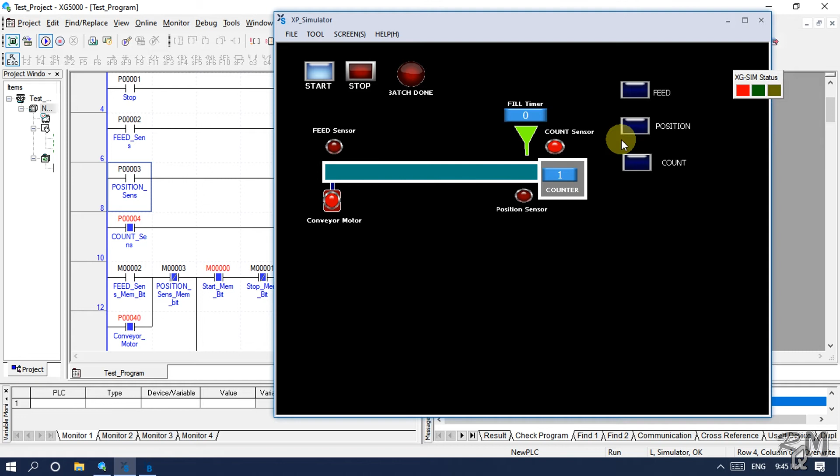This video is especially for those beginners who are curious about learning PLC, SCADA or DCS. In this video I am going to show you how you can create a PLC and HMI simulator which you can use to learn and test your logic skills. In HMI simulator you can visualize your project. Advanced users can also use this simulator during the design phase. Master KPLC and KGL-Win users can also use this simulator to test logic programs.

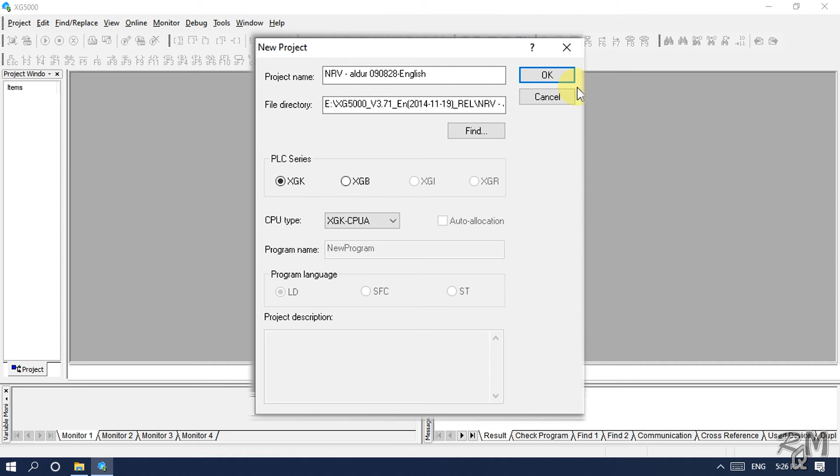If you want to test your KGL-Win logic, then click on the project menu. In the sub menu you can see two options: open KGL-Win file and open GM-Win file. Click on open KGL-Win file. When you click on KGL-Win file, it will ask you to select PLC series. In XG5000 there is no option for Master KPLC, so you can choose any compatible PLC. I am selecting XGK series and CPU type XGK-CPU-A. Click OK. Then a new program window will open.

Maximize the window. You can see your KGL-Win logic with device names. If you want to see variable addresses with device names, click on the view menu, then click on devices/variables. Now you can see device names with variable addresses.

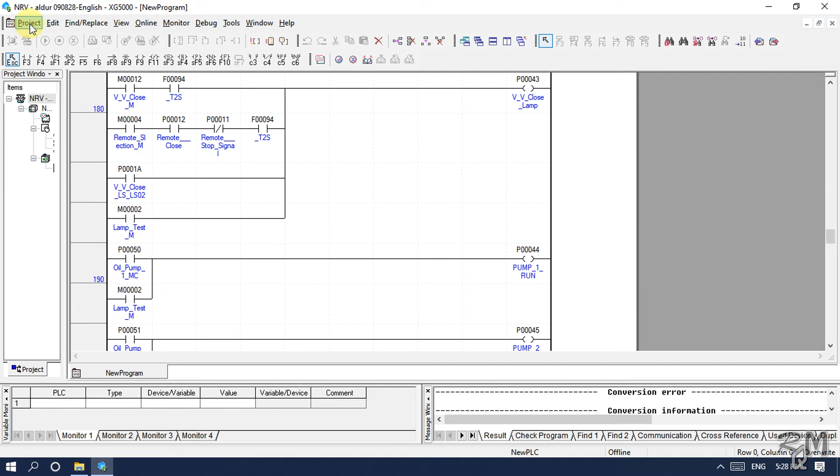Now I am closing this project without saving, and we will create a new simple project for beginners. Just for fun, we will create an automatic bottle filling project with a conveyor.

In this simple project, we have one conveyor with a motor and one feed sensor which will detect the bottle and the conveyor motor will start. The bottle will start moving and keep moving until it reaches the position sensor. When the position sensor becomes active, the motor will stop. Then bottle filling will start with a timer.

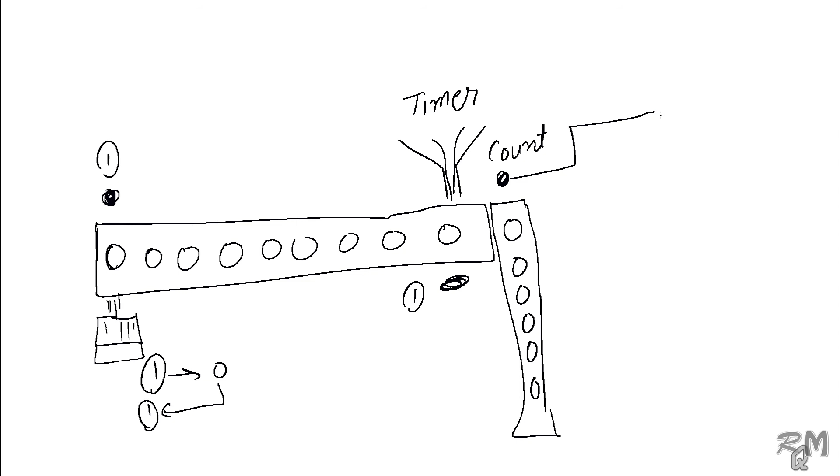When the timer finishes, the motor will start again, and there will be another sensor which will detect the filled bottles. We call this sensor the count sensor. When 6 bottles are filled, the counter will stop the conveyor. So this count sensor will give a signal to one counter.

In this project, we need 5 inputs: start switch, stop switch, feed sensor, position sensor, count sensor. Basically we need only one output to control the motor. Maybe we need more, then we will decide during logic design. We need one timer and one counter. It is a really simple project.

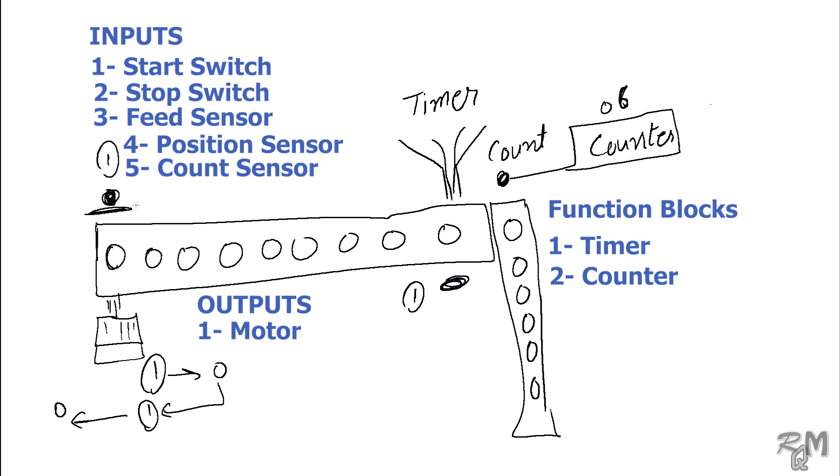Let's get started. Click on the project menu, then click on new project. A new project window will open. Type the project name, test_project. Click on find to save in the desired folder.

In PLC series, we have 4 options: XGK, XGB, XGI, XGR. Program language for XGK and XGB is ladder by default. We cannot use SFC and structured text in XGK and XGB series PLCs. In XGI and XGR we can use all 3 languages. If you don't know what SFC and structured text programming are, don't worry, you will learn in the future. For now, keep in mind that SFC is sequential function chart, like flowcharts, and statement could be any program language like C++, Fortran or COBOL programming.

For our beginner project, I will select XGK PLC and CPU type XGK-CPU-A. Program name, I will type test_program. Program language is ladder by default. Description: for practice. Then click OK. An empty test program window has opened.

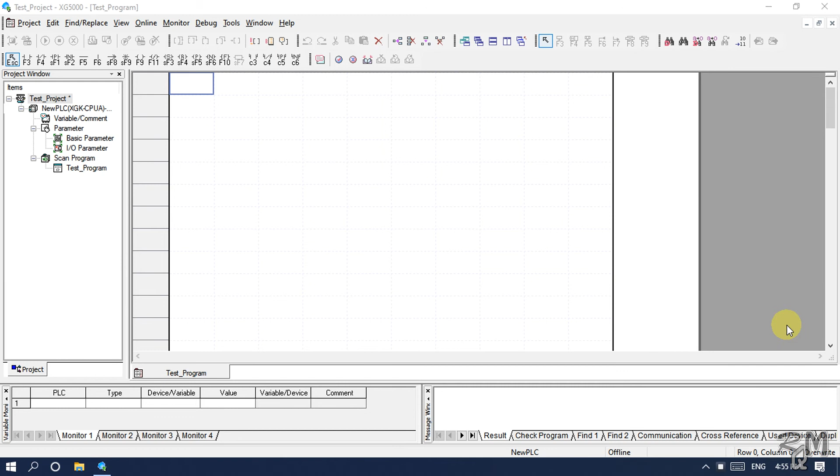Now first I will create the start and stop logic. Click on normally open contact, then click on the first step of the program window. A variables and device box will open. Here you will create a variable and device table of your inputs, outputs and other devices. Currently you cannot see any variable or devices because I didn't create any variable.

Now click on the variables/devices box and enter the address of the input of PLC, P00000. Make sure the add to symbols box is checked. Click OK.

Now enter start in variable box and in comment box also write start. Then click OK. So the first physical input is created.

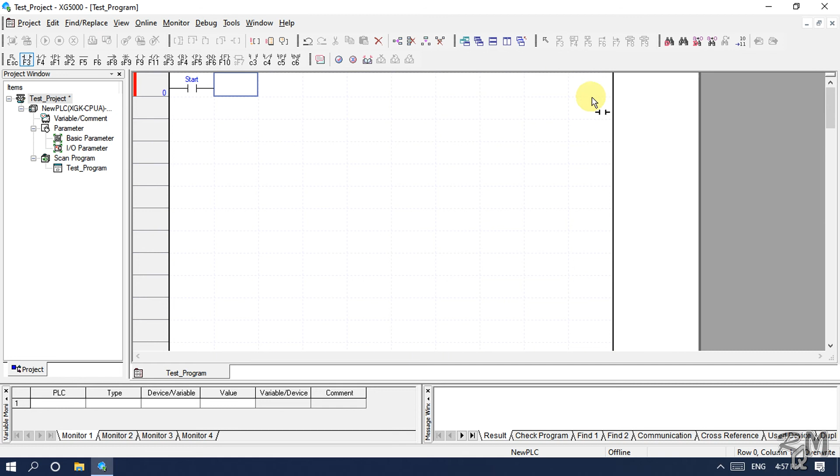Now I will operate output through this input. For output, click on coil, then click on the right side of project window in front of start input. Again the variables device box will open. It is actually your variables or symbols table. You can see the start variable which we created before.

Now we will create output variable. In PLC and DCS programming languages, you can use two types of output addresses, physical or virtual. Physical addresses relate to output cards, whereas virtual addresses are just memory bits or bytes which we use internally in logic design.

We will create start_memory_bit. Memory bit address will start with letter M, write M and 5 times zero. Now click OK. Write variable name start_mem_bit. In comment write start memory bit and click OK.

So we created the first ladder of our logic program. Same way, we will create stop logic. Click on normally open contact.

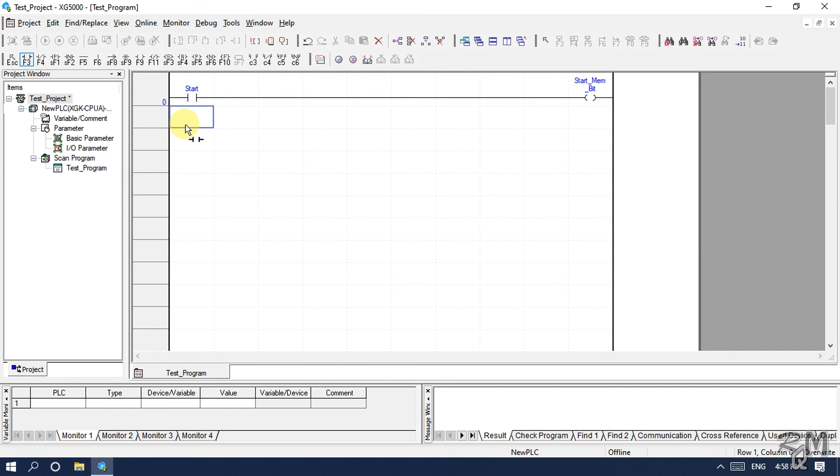Click on second line. You can also write the first variable name. Write stop. Click OK. Now you can assign address to this variable. Enter P00001. Write stop in comment.

Click OK. Select coil. Click on project window. Enter M00001. Click OK. It is stop_mem_bit, you can say stop memory bit. Click OK. Now select normally close contact and click on the line of start logic.

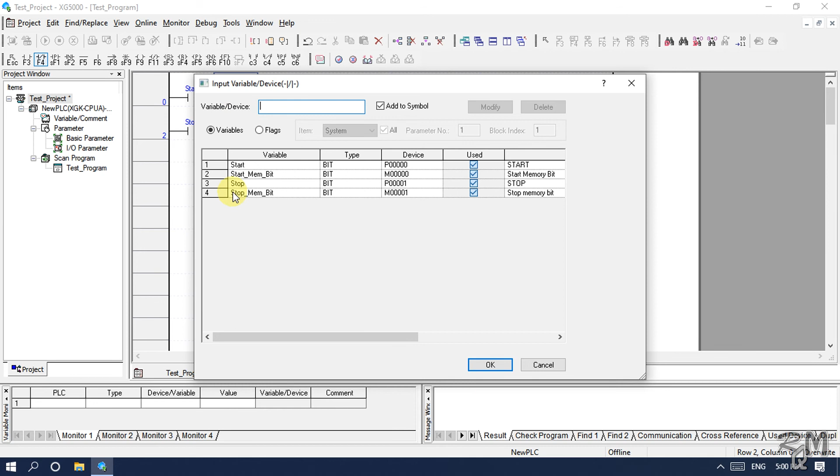Then from the variable table, double click on stop_mem_bit. Our basic start and stop logic is ready for testing.

Before testing, if you observe left side in project window, you can see a small asterisk sign or dot above the test project. It means that this project is not yet saved. So before testing, it is best practice to save your project.

For this purpose, click on project menu and then click on save project. Now you can see there is no more dot. Now we are ready to test logic.

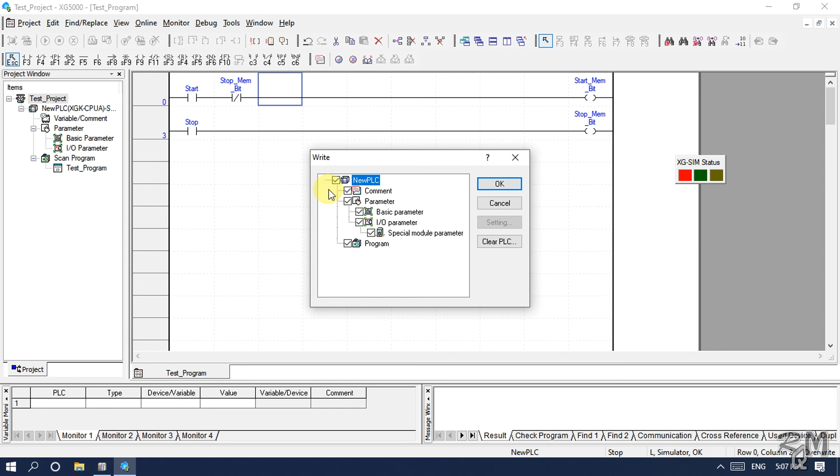For this purpose, click on tool menu and then click on start simulator. Click OK to write or download the program to XG-sim.

But it is showing error. Cannot write program to the PLC. See the check program window for details. Click OK. Writing is not completed.

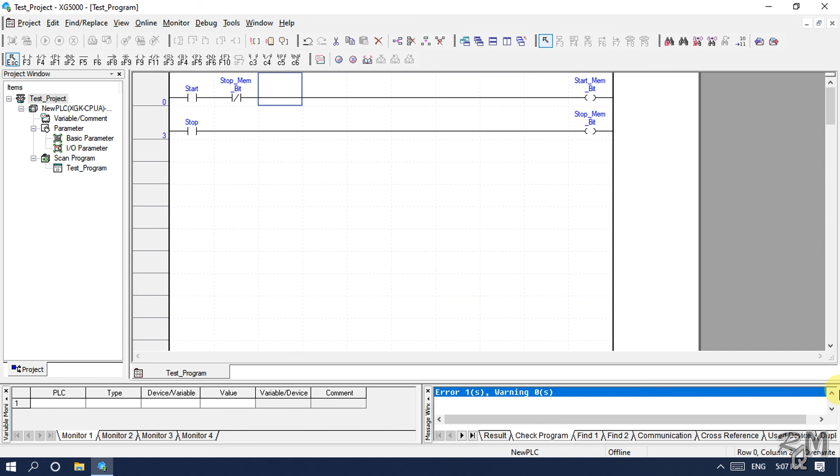Click OK. Now in the check program window at the right bottom of XG5000 screen, you can see error 1 and warning 0. If you scroll up, you can see details of the error. It is error E4000, instruction does not exist.

In most PLC logics or programs, you need to use the end statement to complete and finish the logic or program. So we will add end function block.

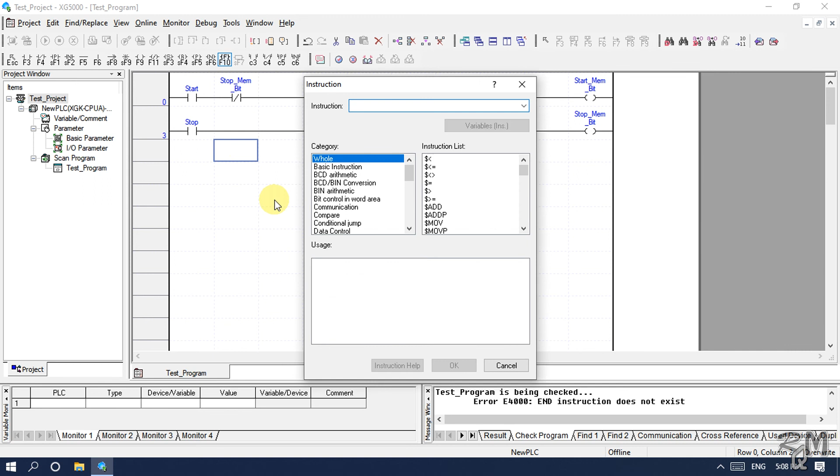Click on function F10, then click on empty line after last ladder. In instruction box search for end. Select end and then click OK. This logic is technically completed.

Now click on arrow and again start simulator. Click OK to write or download in XG-sim. Writing completed without error. Click OK.

Move simulator on right. Make sure monitor button is active and then click on run button. Now double click on start input. Select true and click OK.

Start input is forced to active state and you can see start memory bit is energized. Now to de-energize, I will force stop input to active state. Stop memory bit is energized and start memory bit is de-energized.

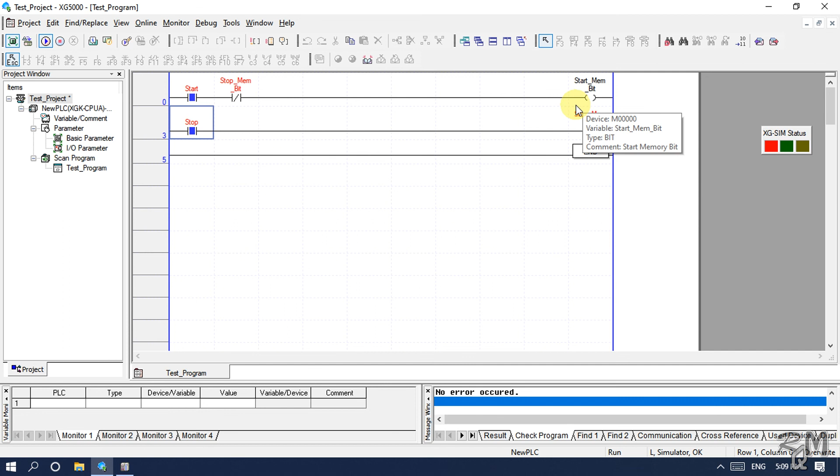Now deactivate start and stop with the same method. So it is a simple method to test logic in XG5000 by using the simulator.

Now I will create a simple HMI screen for this logic. Keep XGSim in running condition, minimize XG5000 and open XP Builder to create HMI screen. Click on Create Project button, select iXP series and model.

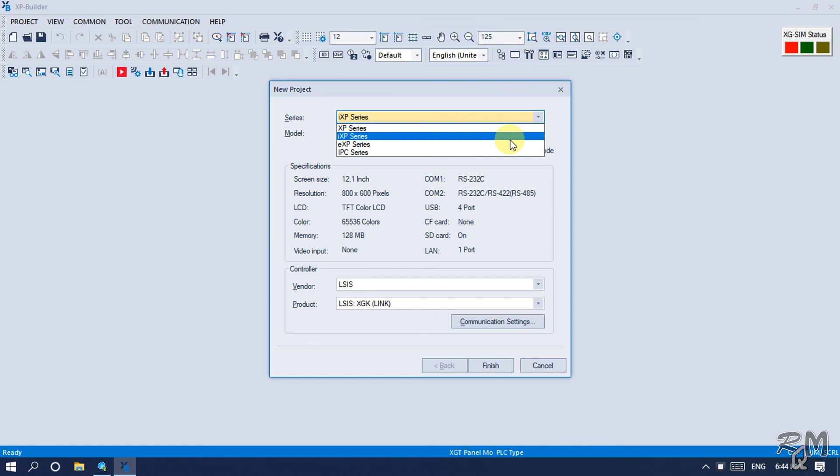iXP50-TTA. It is a small HMI. Click on Communication Settings button.

Here in Controller tab, you can change controller settings and controller properties according to your requirement. Which protocol and COM port you are using, you can set here. Currently we are using PLC simulator, so check PLC simulator box and also check program monitor box. Other options like screen settings, security settings and all downside settings we will not change.

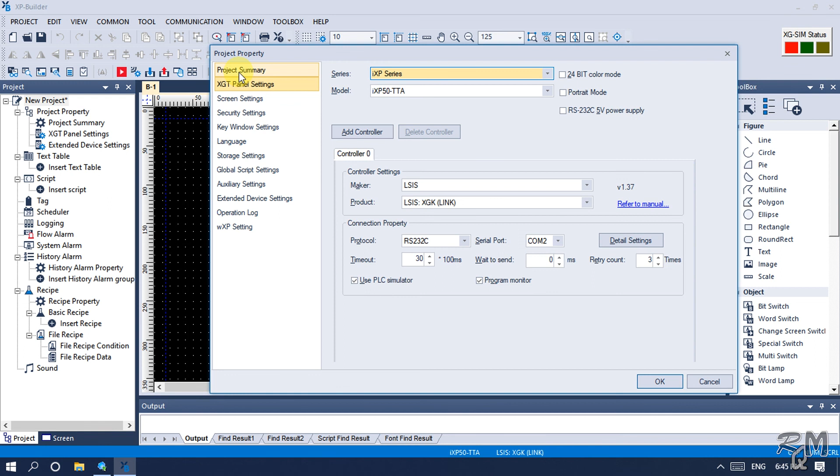However, in project summary, enter project name, test_project and click OK.

Hope till now you understand everything. In next video, I will start to create HMI for our simple logic. From next video onward, I will work together with logic program and HMI screen.